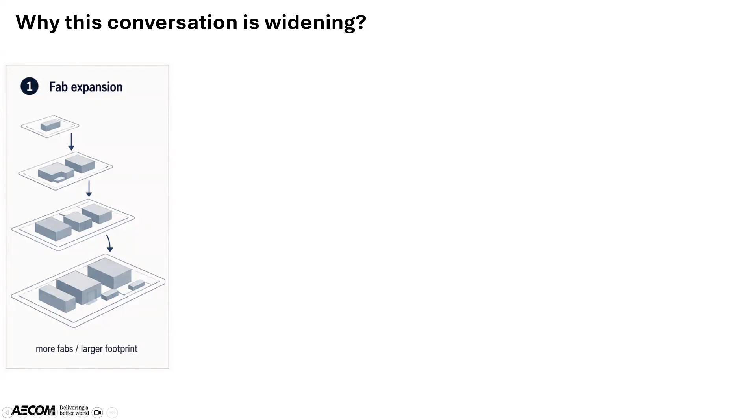Water. What kind of water? Super pure. Yeah, I like it - super. It's called ultra pure, so it's not just clean, it's not just pure, it has to get to that ultra pure water level. So from a solvent standpoint, it's not like your regular water anymore. So the water pressure is very big there.

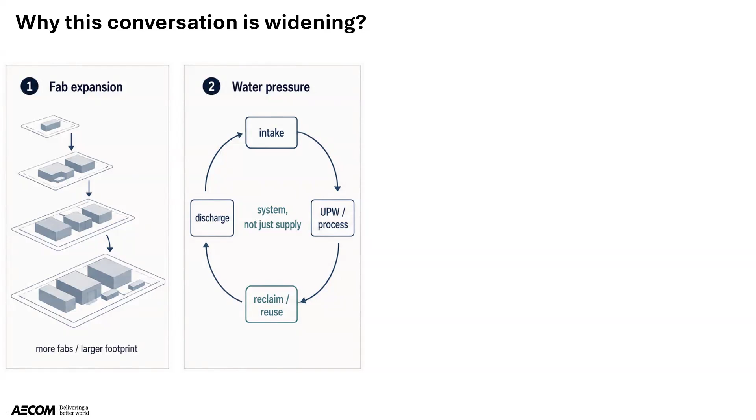So it's not wastewater only, it's also the water that gets into the process itself. But then layer by layer - I don't promise that I'll oversimplify, but I'm trying to communicate the complexity of the challenge we are facing. So the water that gets in, and other solvents and many other chemicals, they have very specific functions. That's a very expensive production line. Nothing is being used there because it's cheap or they're having fun.

Everything there is there for a specific function, and it's not cheap. And that means that soup of chemicals, or different families that we are seeing on the screen, are there to deliver that function. But then that's when the wastewater complexity comes into play. What happens after - let's discuss what happened beyond the fabs. So permitting, wastewater discharge, regulations, maybe.

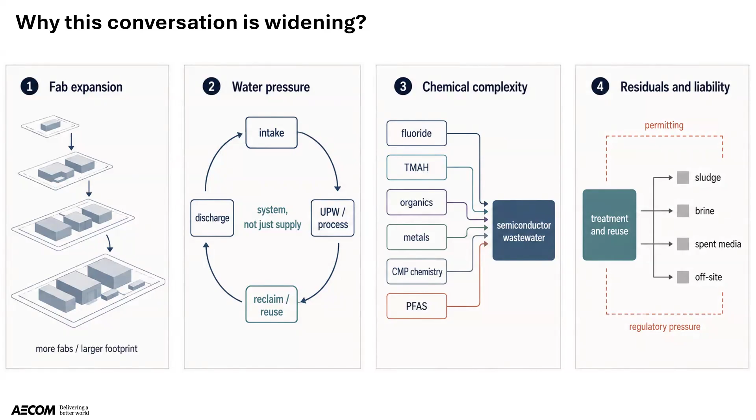That's why I think when people think about semiconductors, it's the exact same word used for many decades. But four decades ago, it was a big device. Now we're talking about nanometers. So it's not only the size of the device that got smaller - to get that small, the fabrication also went through multiple kinds of advancements.

So if we talk about the 80s all the way to the present day, what I'm trying to communicate with you are three things: what is the technology that has been used, what are the chemicals that have been used in that period, and what about the reaction from a regulation point of view - any alignment, any lag or gap?

So pay attention, okay? Again, four decades ago we were talking about semiconductors at that time - a breakthrough, but it was big. And what you see there is chemicals being used, mainly hydrofluoric acid and some other acids, bases, etc.

A couple decades later - I won't give you more detail about the exact description of the technology, but you need to pay attention that the chemistries being introduced to that process are changing. What you see down there is that actually the discussion in 1998 was about the chemistry from 1983. After that, when we went all the way to the nano scale, more chemistries were introduced, including PFAS. But you can see down there, there is quite a gap.

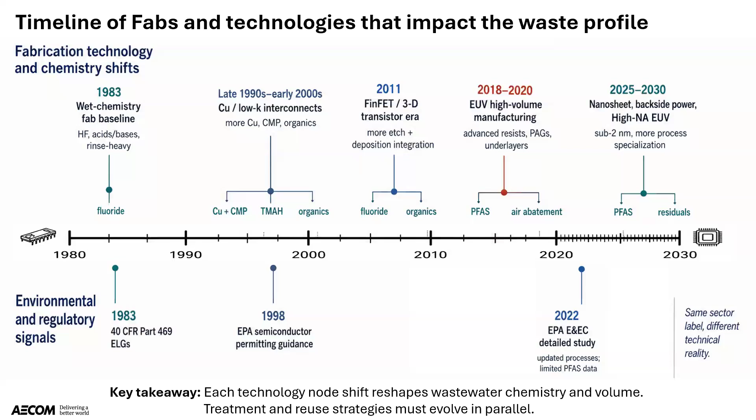Why we're again discussing that today, because we see that there are more push towards regulations of PFAS and other emerging contaminants when it comes to the discharge from semiconductor fabs. So it's the exact same word, semiconductors, but it means different things throughout that period of four decades.

So one would say, do they know anything about that? To be fair, zoom out and be fair - these are two keywords I like. So the semiconductor industry, they have that SIA, Semiconductor Industry Association, for three decades plus. They have been studying what's getting in, what's leaving the facility. It's just like a very tight circle, but they know a lot. And that's, I guess, the take home message - there is a lot of information.

A lot of funding even comes from them that funded a lot of research questions. If you talk to them, the first PFAS membrane study was funded by that association. Some analytical work that I'll discuss later was also funded by them. Not all, but that's basically some of the disconnect - people think they're focusing on one area, but there are others. So there are white papers, there are videos that can be found on their website.

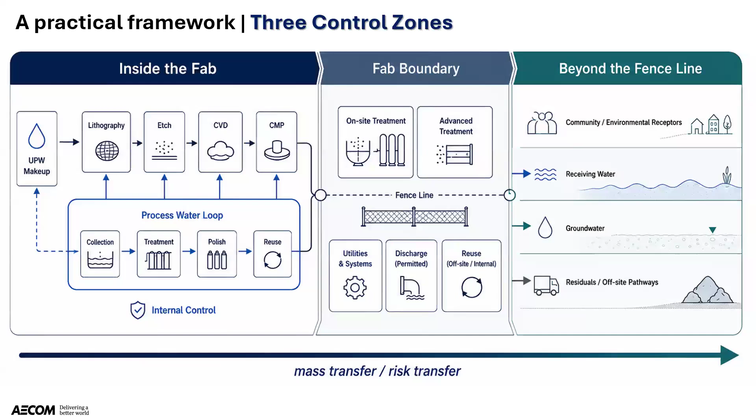Laying the ground, meaning that I wouldn't talk about silos anymore. We need to connect what happened in the fab to what is happening between the fab and environment - meaning treatment technologies, but also considering once residuals, emissions, wastewater leave there, how can we think about it from a holistic point of view? They are all interconnected, they're all impacting each other, and that's how we should be thinking about it. So that's basically that - not just the mass transfer, but the risk transfer is moving from inside the fab technologies, and then later on can be distributed differently.

So when I mentioned - thank you for highlighting that water is the largest solvent - to get to ultra pure water, this is an indirect way to tell you that they know about treatment, like to get the water to the ultra pure stage. This means you know how to treat water.

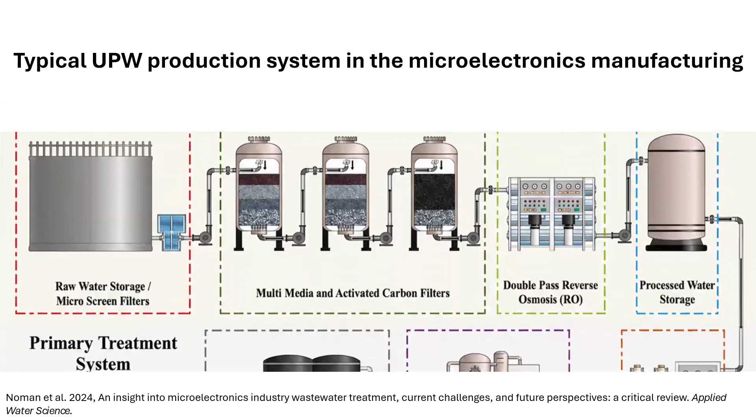But I will need your attention now because I'll have a quiz after this line. Because it doesn't just go with pre-treatment - a lot of removal of salt, desalination, biological, chemical, physical. So it is not just your regular treatment train. I gave you a warning. So how many steps? That's the initial train - it's 15.

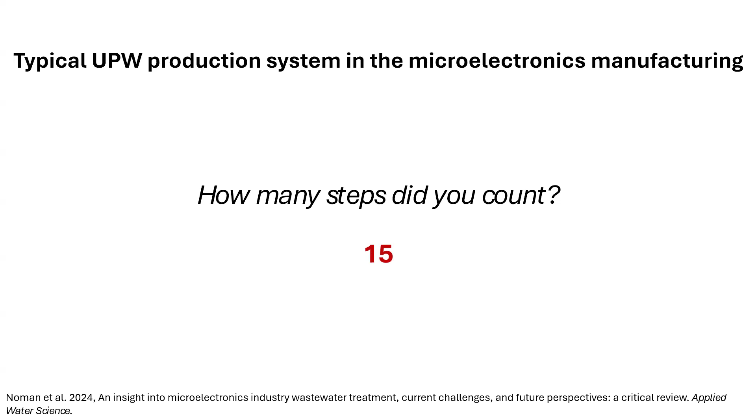So to get ultra pure water, you need to pass your regular source water into 15 steps. Sometimes they take drinking water, but okay.

So you remember the mass transfer, risk transfer? I guess it goes that way as well. But inside the fab, your ultra pure water, you'll get some residuals. But also, when it moves from one step to another, they can be in parallel. You will get different pathways where the contaminants will result from different steps, but also lead to different soup of chemicals - I guess the easiest way to think about it.

Water conservation is one part, but also the sector is about minimizing how much water can be used. So water reuse is a common practice. So knowing what is getting into that reuse step is very important.

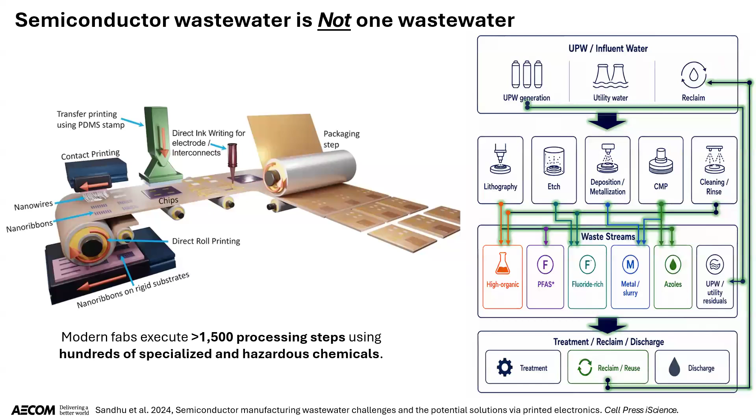And here's another reminder - we talk about water a lot, but this is another reminder that it's not just water. The air, for example, from the etching process - this is just a random example - is what is leading to some fluorinated material in the water space. So your air problem is a water problem as well. Your treatment for water is resulting in residual like solid waste. So everything needs to be put together. It's not just air, it's not just water, it's not just solid. Everything is interconnected. The relative contribution will vary, but the big picture will remain.

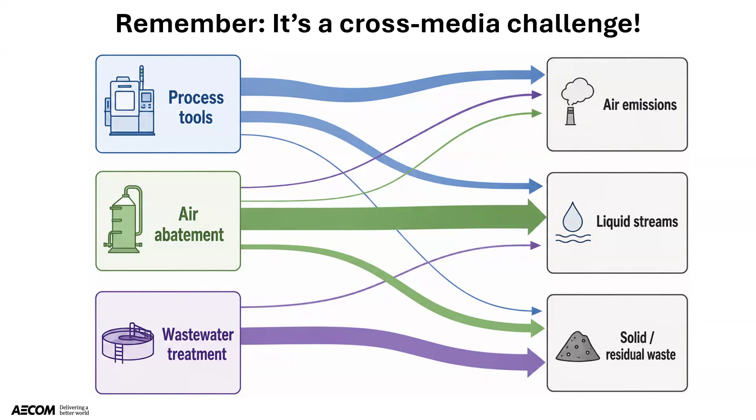So normally my talks are dominated by PFAS, and that's a regular one for me. But what I'm trying to communicate here is, again, not to overwhelm you that it is overcomplicated, but acknowledgement of that complication or the challenges is a very important first step if we want to make it a better scenario.

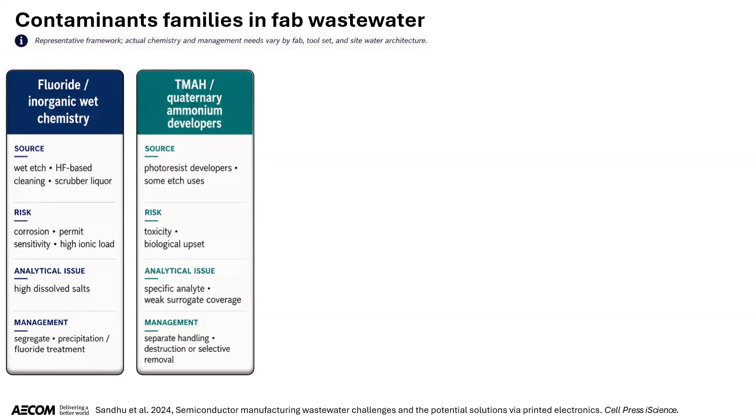But it's not just one thing, so from an analytical point of view, you will need to know how to measure that in that mixture. Solvents—we talk about water, but other solvents, actual organic solvents, are being used for these different steps. So you'll get high COD values, VOCs are there, and that soup is getting more and more complicated.

Metals are there from metal plating, the packaging steps, etc. So you'll get a variety, depending on the technology you're relying on—CMP process and the chemistry in there, and the packaging, including azoles. These, I guess, will be the main focus for the next two presentations.

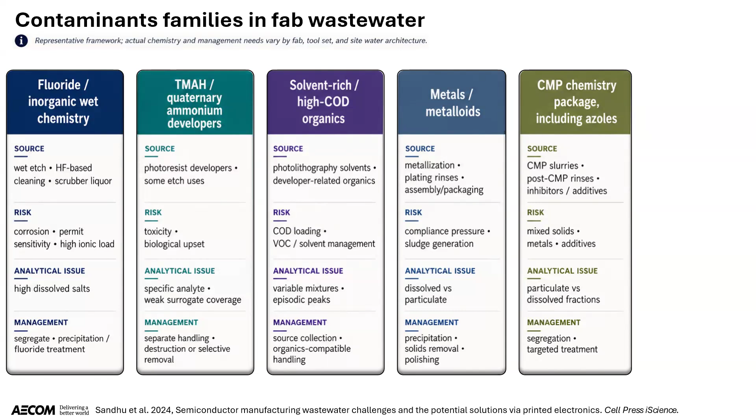But what I'm telling you, it doesn't come alone. Again, my favorite—not really—PFAS is there as well. They come from different steps, and soon I'll show you that they are not going away.

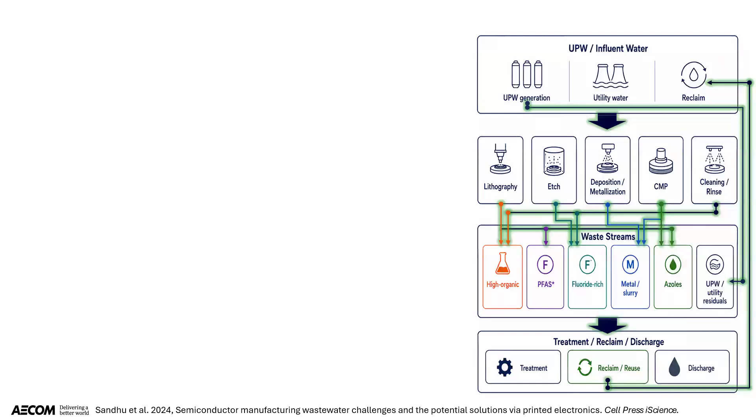I promise, I don't want you to read anything there, but that's what you are potentially looking at when it comes to dissecting that wastewater. You will get a soup of chemicals that come from different sources, different flavors. Don't taste it—but that's the mixture you will end up having.

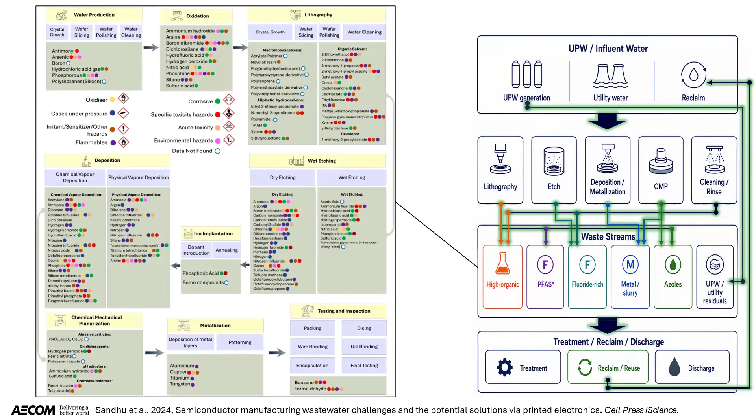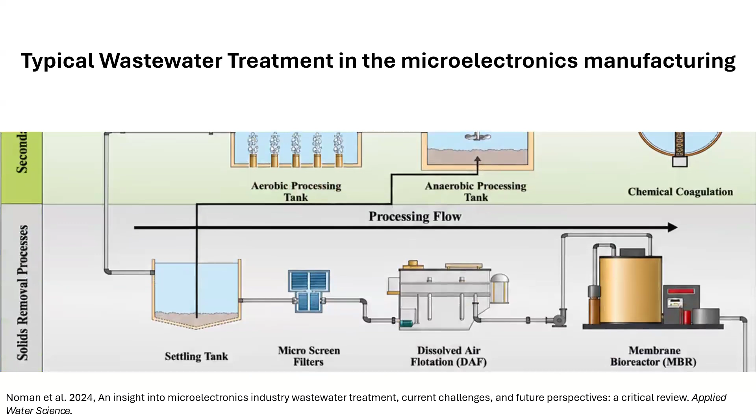And that translates to another thing. Okay, now you're ready, right? So talking about wastewater—the wastewater leaving there, especially if you talk about MLD or ZLD, zero liquid discharge or minimal liquid discharge, your wastewater needs to pass through many steps: physical, chemical, biological, if you are considering or relying on reuse as a practice to minimize your water intake and consumption.

Okay. Oh wow, love that. Okay. Thank you. Okay, see, it's the benefit of not getting the session after the lunch.

So I guess, logically speaking, if we want to minimize the complexity, you need to think about segregating these waste streams. But that's a luxury, because some of these fabs are already built, some already designed—it's a very expensive process. And there is no clear or hard regulation pressure for some of these chemicals. But if we want to approach it constructively, how can we minimize that complexity and maximize the potential treatment efficiency? Waste segregation.

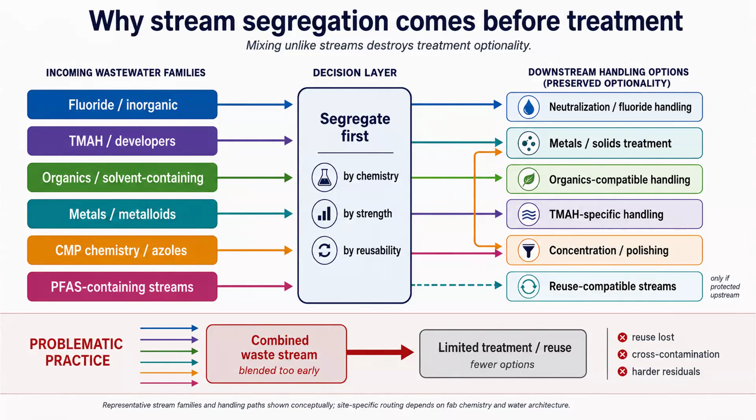But again, from a sector perspective, someone sitting in from Micron is just like, of course we know that—we segregate different waste streams because we want to recover metals, we want to reuse certain waste streams. So it is happening, but is it part of common practice, or at the scale that we need, and the source of wastewater that we hope for?

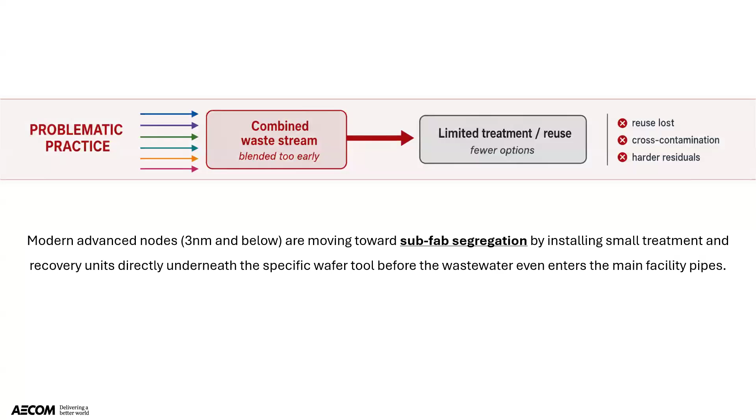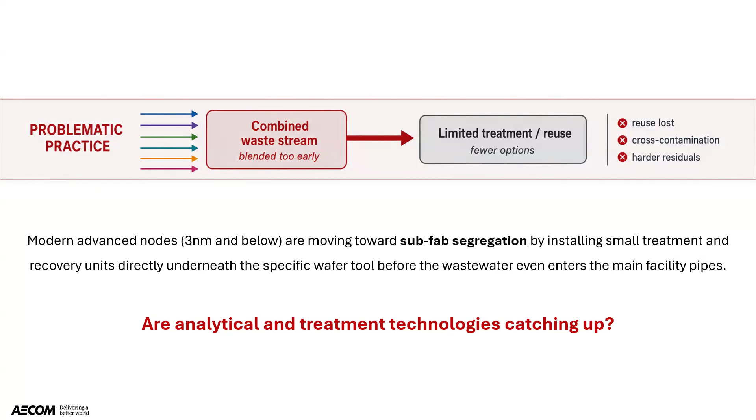Well, not there yet. But again, you remember my favorite word? Fair. To be fair, there are actually some analytical and treatment technologies that are really catching up with that purpose of waste segregation and management of different waste streams. What I mean by that—now I can come back to my favorite, PFAS.

Okay, so why PFAS? It's not just a buzzword—it is literally not going away. It's an essential part of that process. When a Cornell study published the estimation for the potential use of PFAS in the next 10 years, it will just keep going up. So it is there, and it is not going away.

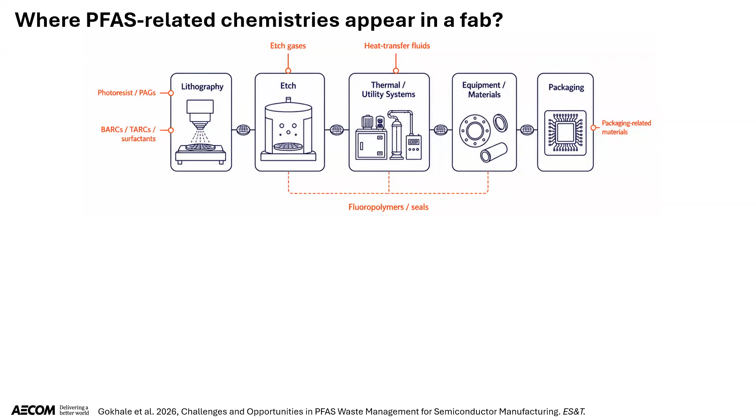But where is it coming from? Again, not all processes in the fab are producing PFAS or a source of PFAS—they come from certain specific units that deliver specific functions. So we have a variety of different PFAS structures, but that's not as easy a matrix to characterize. Characterizing the wastewater in there is one of the major challenges.

So if you want to convince someone that you need to do better, you need to show them how, and the analytical challenges are not catching up. I can spend a whole presentation on analytical work for semiconductors, but NMR, for example, is catching up because it can avoid a lot of limitations. You remember the first column—it was fluoride.

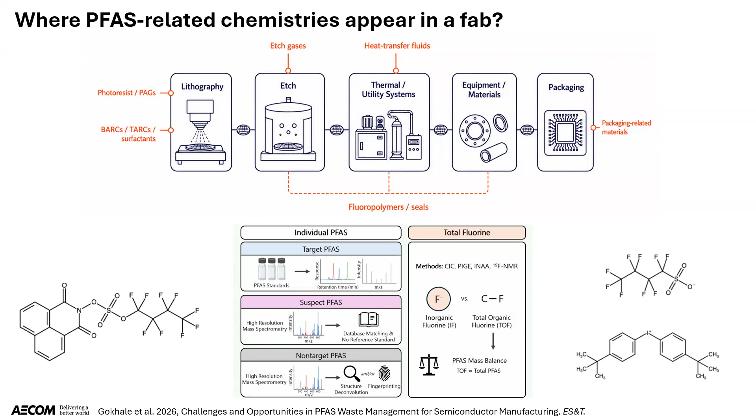If you are trying to quantify, from the previous presentation on PFAS destruction, if you aim at mineralization to get fluoride as a final product, and you have ppm of fluoride in the background, how can you reliably and practically quantify that or make sure your treatment or destruction is working? It's still a challenge and a bottleneck.

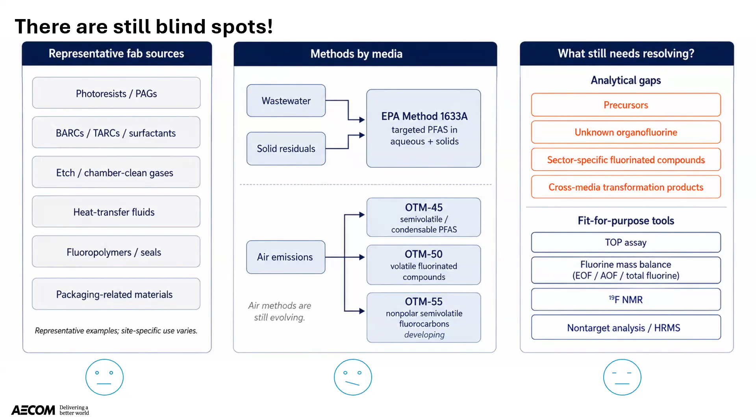So this is where we are. We know how to identify sources, how we can potentially segregate them, but then we get into a reality check. What are the tools available to measure PFAS in air, PFAS in water? You can see now it's getting a smaller menu. So there are a lot of challenges before we can comfortably say we know how to do it. Same applies to destruction.

I guess Silvana put that very good quote, what was it? Vision without funding is hallucination. Yeah, so that's it.

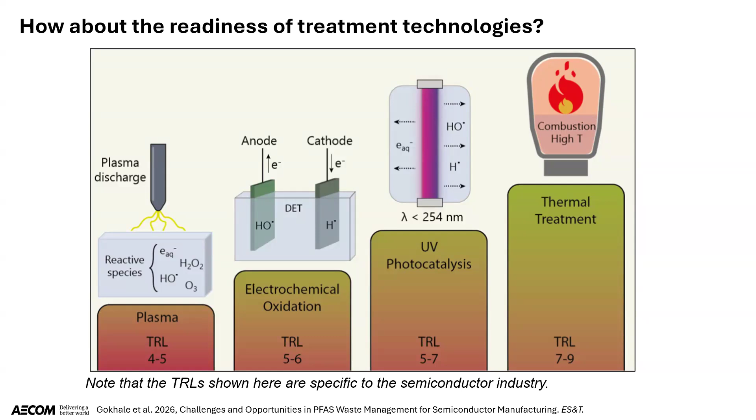Okay, I'll wrap it up soon, but from a logical perspective, we know how we can make it better. This is just one of the examples. If we can segregate, pre-treat, and then think about how we can manage that waste, we can get it done.

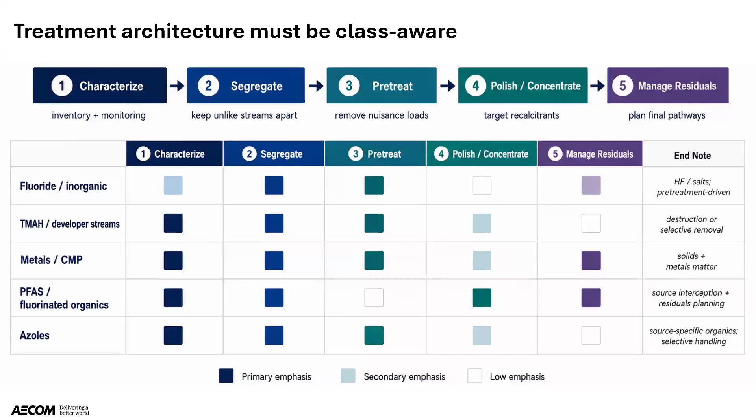So I'll leave you with six questions as of 2026, when you are trying to think about fab better practice. We need to think about which contaminant family controls the risk, so we need some risk assessment. Then from that overwhelming number of chemicals, we need to think about these families of chemicals, their sources, etc.

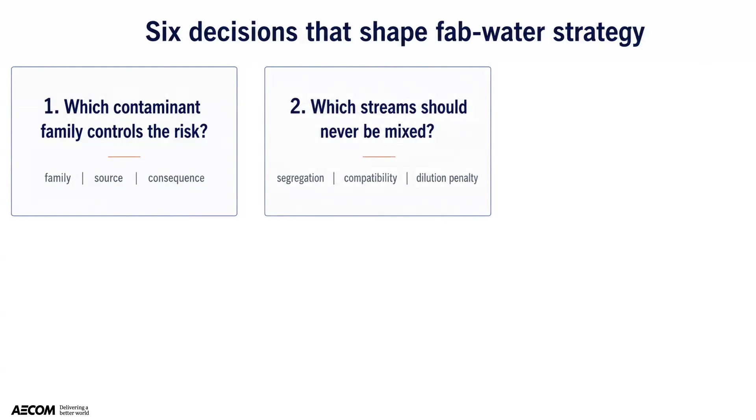Segregation, with the hope for treatment. Then we need to think about which streams should never be mixed, because once they are diluted, it's much more expensive to manage. But then a third question is what is worth protecting in terms of these streams. How can we evaluate that is key to the success of the other questions.

So measurements, analytical techniques, and how frequently we can do that. Do you really need an inline sensor for continuous monitoring of certain contaminants, or can something be more episodic?

So that's five - the residuals. Because again, what happens in the fab eventually will impact the environment in one way or another. Solid residuals, air emissions, and others need to be considered very seriously.

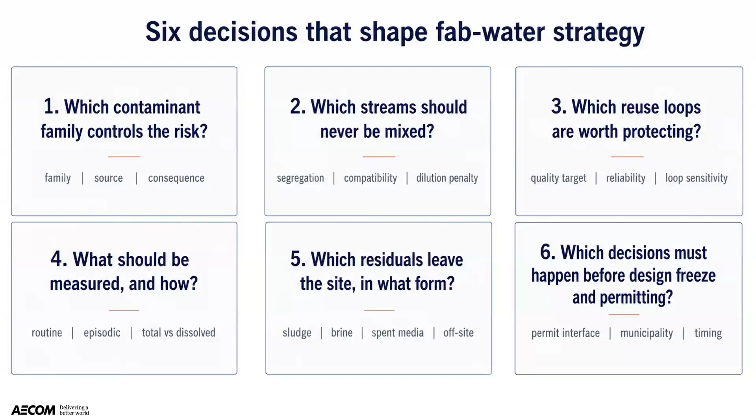Again, from a fab's point of view, there's certain infrastructure that's very hard to change and almost impossible to do. But if we're now in a period where a lot of funding is going into designing and building more fabs, what are the questions we should prioritize before any design freeze or permitting? That linear, interconnected relationship between inside the fab, treatment, and release - now you can see it's actually more interconnected than just a linear fashion.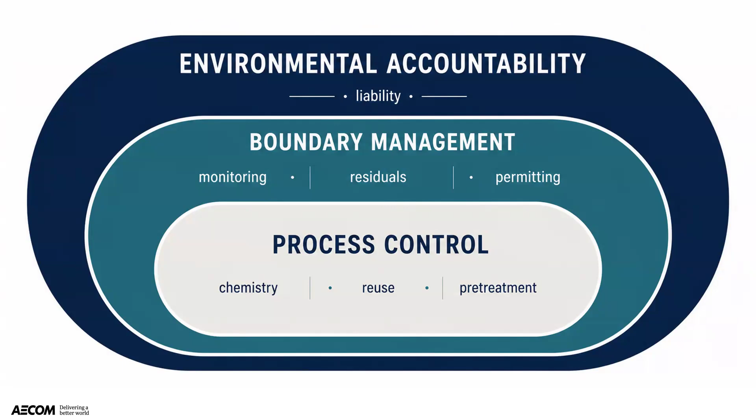Okay, I'll stop here. Thank you.

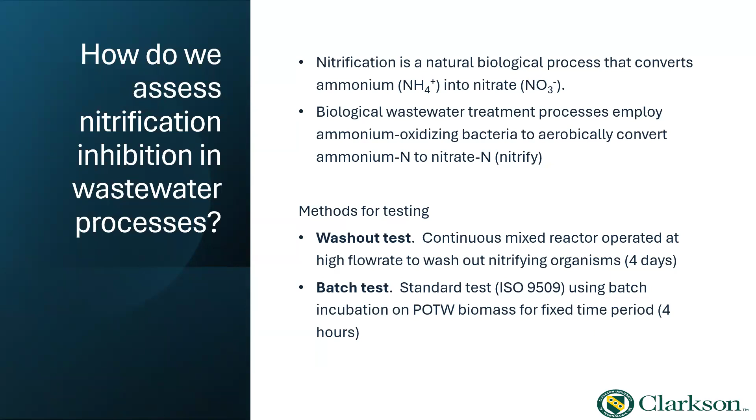The one with the washout test takes 4 days or 5 days to complete. The other one is 4 hours. So there is a clear incentive for one or the other from an analytical perspective, but there's always some benefits. So talking about both of those processes, the washout test is a chemostat or a biological process where you take the sludge culture from the wastewater treatment plant you're concerned about.

So you take activated sludge from that plant and you feed your wastewater at a higher rate than the nitrifying organisms can grow. And so what that means, because you don't have a clarifier sitting on the end of it, is that you're eventually losing your biomass. You're washing them out at this high rate of hydraulic flow because they can't grow quickly enough to recuperate. And so that's what's called washout in a biological process.

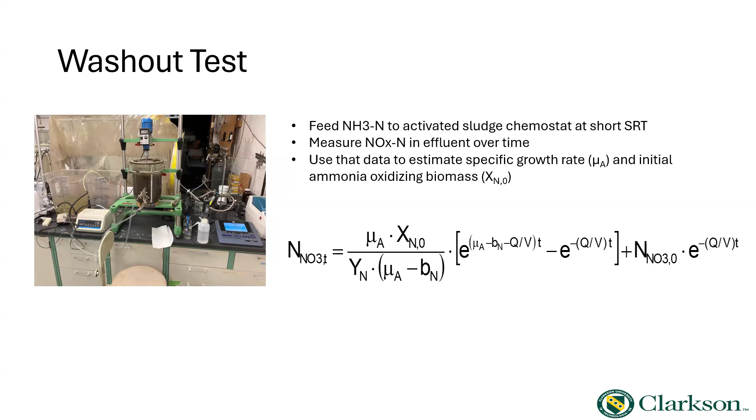So the process engineer loves this because they have this number and this number, and they can design the reactors based on them. Okay, so this is a great example of a complex waste stream. I don't know what is in that waste stream. I just know what it does to my activated sludge culture, right? So the next question is, what is a potential problem? Well, it takes 4 days. That's a challenge. You have to do it with the culture you're trying to investigate.

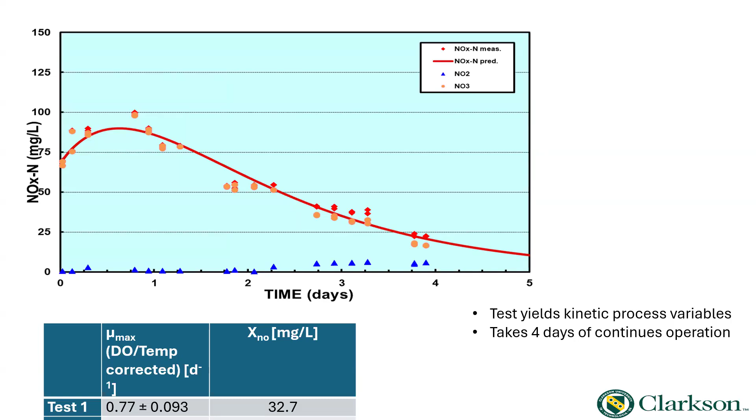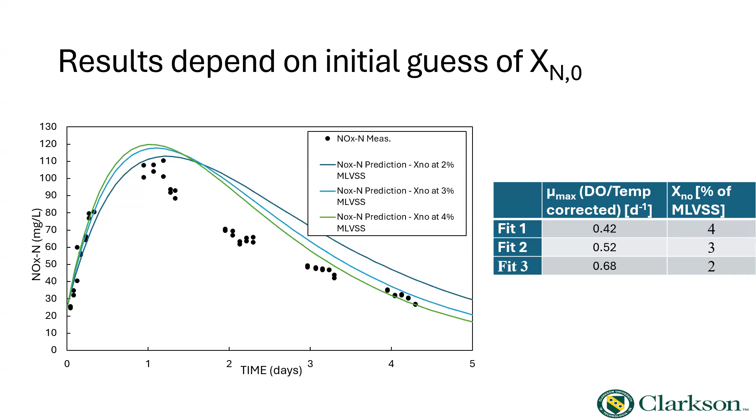The alternative experiment, or a different type of experiment, is the nitrifying inhibition experiment. It's a batch experiment. So that's ISO, I always forget the number, it's written right there, 9509. So it's a batch experiment where we're trying to look at the inhibition. So we calculate the inhibition of a compound at a certain concentration relative to

a control. And so I have a control experiment where I don't have any chemical of concern in the solution added to an activated sludge culture. And then I have an experiment where I measure nitrifying activity relative to different concentrations. And ultimately, I'm calculating that inhibition coefficient, this Ki.

And I measure the inhibition, the nitrifying activity, after just 4 hours. So it's a batch experiment, 4 hours, well-aerated culture. And I do this at multiple concentrations, so 6 different concentrations. And so I'll give you an example how that looked for us.

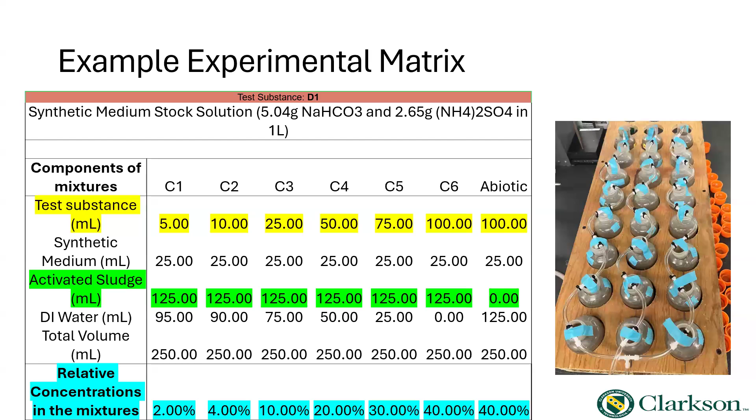And what we're interested in essentially is the inhibition factor, the concentration where we see 50% inhibition occur. So for triazole, it's 3.5 milligrams per liter. For benzotriazoles, it's about 2 milligrams per liter, and the MeBTA is 2 milligrams per liter. So these are known inhibitors. There's lots in the literature. So our work is consistent with those parameters, pretty much the same.

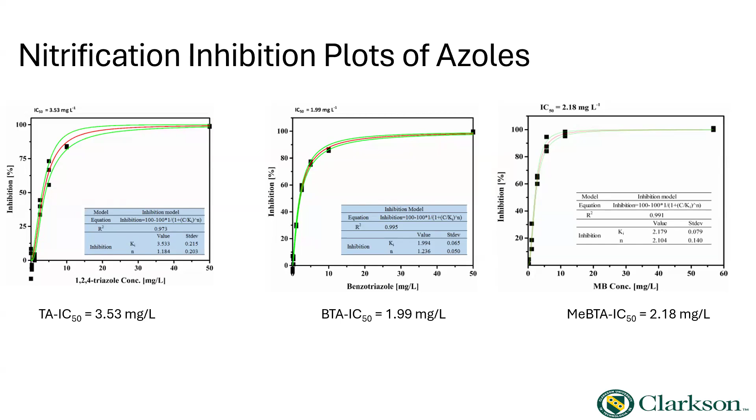Right. So this is a very easy test to look at that particular waste stream. And we did these because we knew these azoles are used in the fab, just to evaluate our tests and be consistent with other people in the literature. I want to give you an example of where we tried this.

So the company we worked with was interested in ultimately reducing that toxicity impact to the municipality. And one place where that could occur is the corrosion inhibitors in their cooling towers. They use corrosion inhibitors in their cooling towers like anybody else does. And a lot of those corrosion inhibitors contain azoles. Right? So these are one part of those.

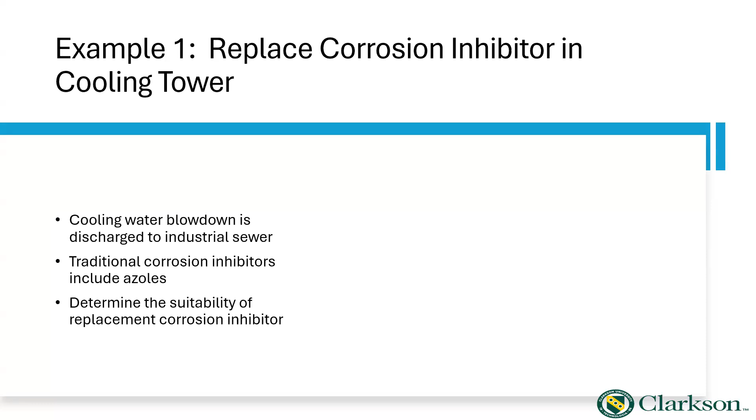And the company they worked with, the subcontractor, came up with a new formulation of a corrosion inhibitor. They tested it in terms of efficiency, whether it would actually prevent corrosion in their piping system. And then we were charged to look at whether that would positively impact the toxicity. In other words, reduce toxicity.

And so what we did is we looked at their different types of products. The company is actually Nalco. They have different azole-type corrosion inhibitors. And then they also have this market product 3DT398. I don't necessarily know what's in there. It's just supposedly a chemical which has no azole-containing material.

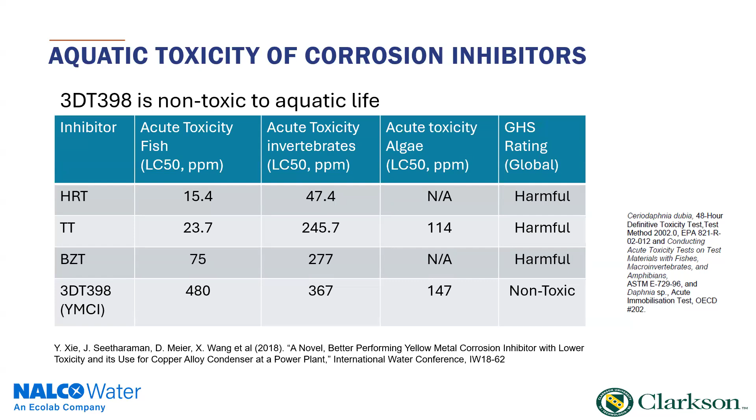And so they did internal testing for acute toxicity against different types of environmental concern: algae, fish, and invertebrates. And you can see the numbers are higher, or it's essentially non-toxic, relative to the azole-containing corrosion inhibitors. So what we then did is we similarly tested that product against the one they had earlier. The material they had used earlier is the 3DT230, which contained azoles.

So here's our toxicity test of that material. You can see that for this material, at about 123 milligrams per liter, you see 50% toxicity. So it's actually a pretty high concentration. They think that's not very toxic, relatively speaking.

When you look at the data which we received for that new component, the data is all over the place. But one thing that is noticeable is that it never reaches 50% toxicity. It really hovers around 40% toxicity. Right? So we really couldn't get a very good fit in terms of what the IC50 is for that material, for that pure compound.

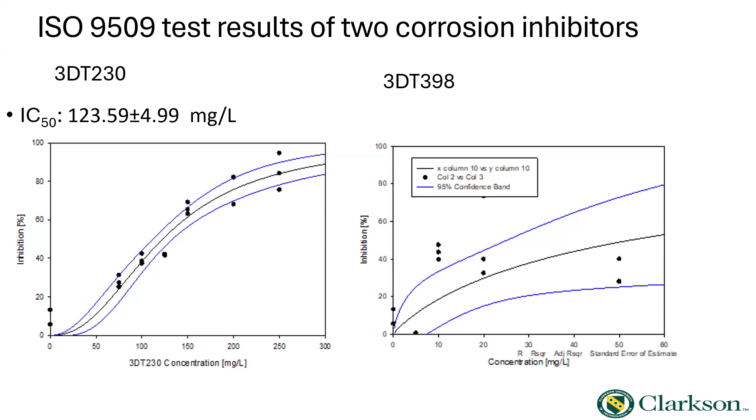Remember, we're not using anywhere close to these concentrations as a corrosion inhibitor in that cooling water. So what we then measured is ultimately the blowdown. The blowdown is when, every once in a while, that water, which is accumulating in the cooling tower, gets released and put into the sewer system. So essentially they empty out that blowdown and release it into the sewer system. And for that blowdown, we can measure the overall toxicity.

Obviously the blowdown doesn't represent 20% of my overall fab effluent, but that's what that number indicates. Whereas if you look after the change, you really couldn't find any toxicity. So this is an example where we used inhibition testing as a validation that this new corrosion inhibitor is markedly better and reduced the overall toxicity of their fab effluent. So that was one example.

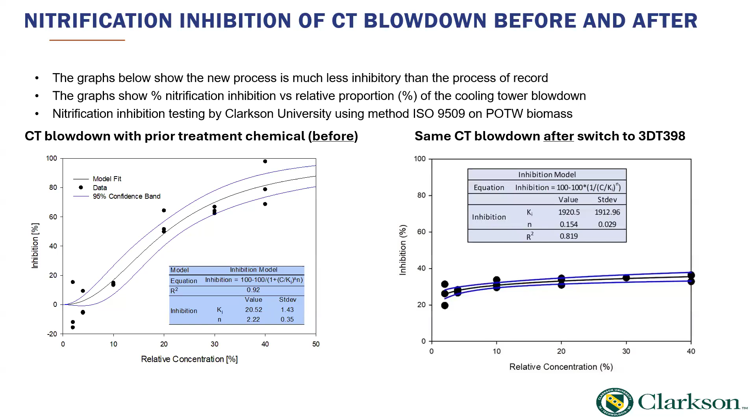Another example, and we're still working on this, is what happens when you go in the fab. The fab, as Mohab described, is a really complex entity of many, many processes going on at the same time. A lot of those processes are batch processes, and this waste gets released into a very complex sewer system. Some waste gets separated immediately and probably doesn't enter the sewer system, while other wastes go into it. They get blended, and eventually they get released through the fab effluent.

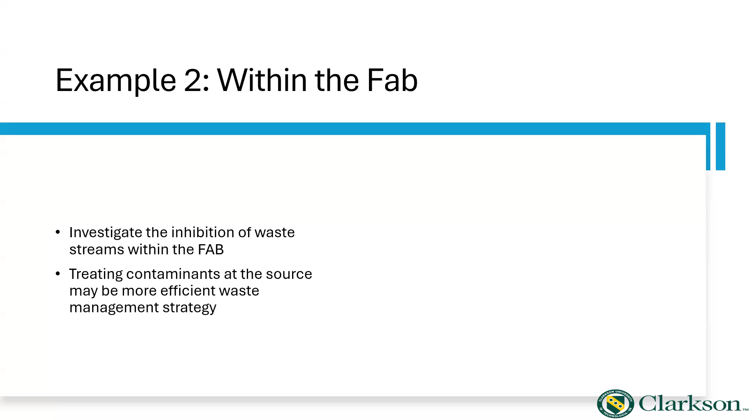So what we wanted to study is: can we identify streams within the fab which are potentially more toxic than others? Not necessarily looking at the total mass balance, because one waste might be high volume versus another blended together. We just wanted to look at the individual toxicity of these individual streams. And so I'll just give you one example.

For a particular manhole, we had 3 different streams going into one manhole. We tested these different streams for known inhibitors, the azoles. We also measured conductivity, and for some other ones we used TMAH, which is what Mohab described before. So we measured concentrations. These concentrations down here, if not indicated otherwise, are micrograms per liter, so very low. Remember, the inhibitor concentration for triazole was about 2 milligrams per liter, so this would be close to that.

So for that particular stream, you would expect 50% inhibition just because of the triazole. We measured those concentrations in micrograms per liter, and then we measured the inhibition of that particular waste stream. The inhibition of this waste stream was 17%, meaning that if that waste stream were 17% of my total wastewater, I would expect 50% nitrification inhibition. That's how you would read that. Then you have stream number 3 and number 1, and each of those we characterized.

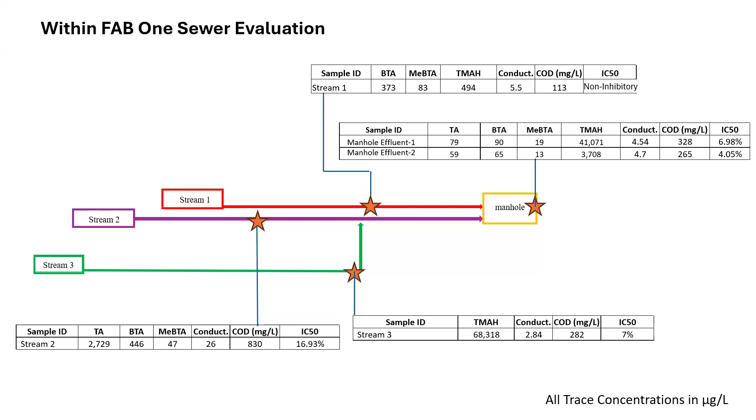If we know, then we could say, well, this is a very toxic waste stream - maybe we don't put that in the sewer system, we just treat it separately. That would be the engineering answer: keep that separate and reduce the overall toxic impact of the fab. That's the usability of that testing. We are continually working with the fab to identify those particular waste streams so we can source-isolate them from the main wastewater stream.

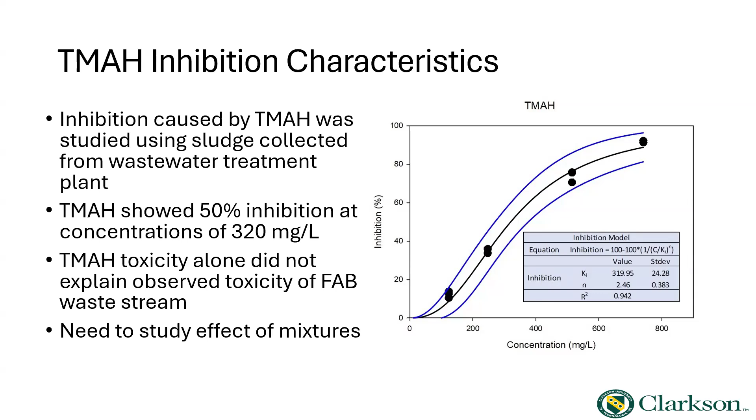So in addition to just looking at individual compounds, we need to understand what mixtures of chemicals do to the overall net impact, because it's not additive. We're adding a whole bunch of chemicals together, and it's not necessarily an additive effect in terms of toxic effects.

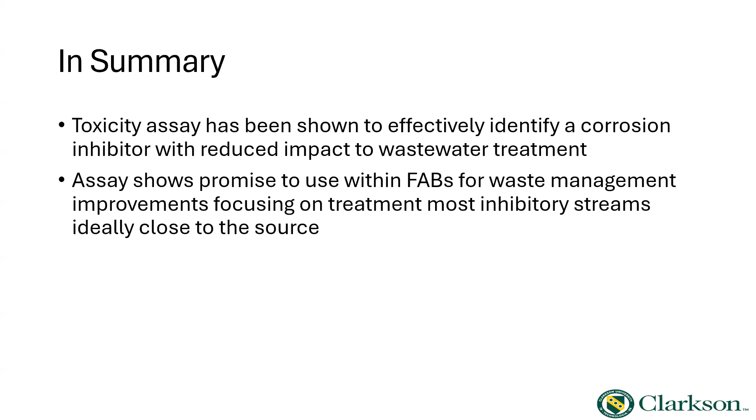So in summary, I showed you a couple of assays and how we can use this tool - these batch experiments - to identify and make decisions within the fab to make it less impactful for downstream wastewater processing. But we need to link that tool with analytical methods or sensors to identify the specific toxic elements. There's more science to be done to close those gaps. All right, I think that's the last slide. Okay, thank you.

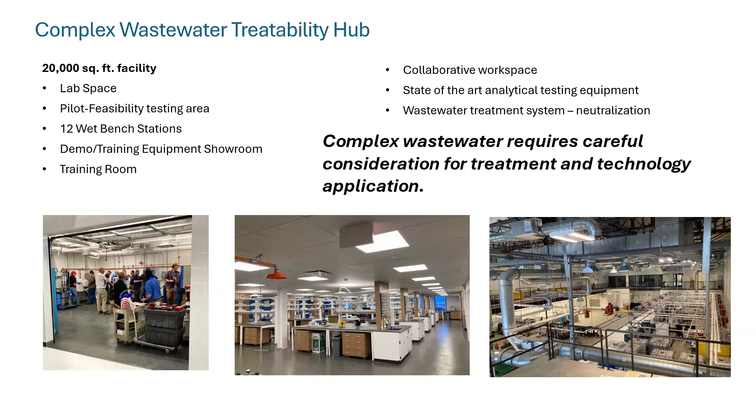So let me get to the challenge we had. We had a semiconductor facility that was increasing production and was going to be discharging azole compounds to the local authority. The local authority finally said we are reaching the limit of what we can take from an azole perspective into our facility. They were obviously able to deal with it, but we're reaching a point where they would either have to increase their infrastructure or this semiconductor facility would have to reduce the amount of azoles.

There wasn't really, first of all, any online metrology for azole detection at the moment. We're working on it, but it's not there today. So we utilized both the Pittsburgh facility and our innovation labs, and did extensive testing around azole destruction, looking at advanced oxidation processes, mostly trying to utilize UV so we didn't have to implement too much chemical. However, given the background of these waste streams and what's in them, the UV intensity gets impaired. So we stepped back a little and looked at some physical chemistry of what we could do to break down these azoles.

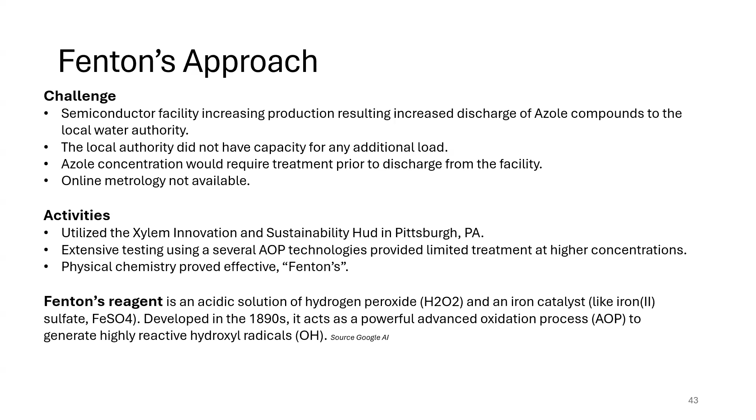So in our testing, we used sulfuric acid for pH adjustment and also iron chloride, which were added in a test that I'll show on the next slide.

We kept a constant temperature of about 60 degrees C in the reaction. You can see the cumulative doses of peroxide that were used.

So we're using both the ferrous chloride and the peroxide, along with temperature and time, to work on breaking down those azoles. In that timeline, anywhere from 120 to 135 minutes, we're able to get 90 plus percent reduction of all azoles in that waste stream, reducing what's now going to the outfall of the facility.

What we're finding is that there's a limit the POTW can take, or if they've got an end-of-pipe reclaim with a biological system, there's a point where they'll run over that toxicity limit. So we're able to adjust the chemical and time to reduce the amount of chemical we use and still meet those minimal parameters.

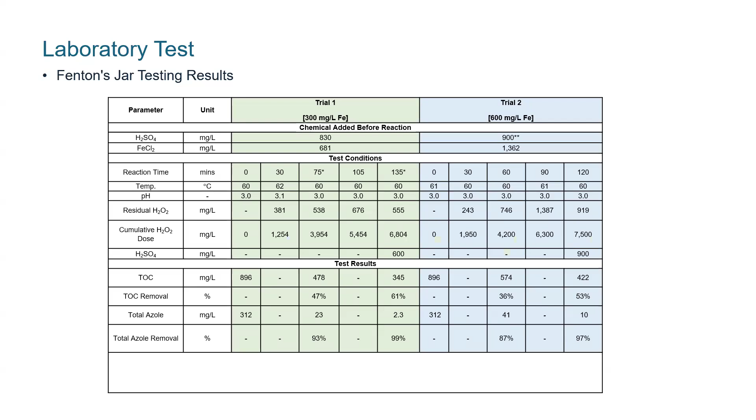The first test we did, summarizing the results, we actually didn't start taking samples until 75 minutes into the reaction. It was a simple setup with a beaker, heater, pump, and recirculation, dosed, and you can see over the timeline what the concentration reduction was.

I can say that the benzotriazoles are readily removed in the process very quickly. It's the pyrazoles and 1,2,4-triazoles that seem to need longer time in order to break down in the system.

The other part of it is the analytical methods weren't very clear on actually measuring azoles in these waste streams. So we ended up working with a lab we work with for our PFAS solutions. To Chuck's point, he was rather upset when we sent him the first samples, and he tore up his mass spec chromatography unit. This is where I get out of my depth a bit, being a mechanical guy.

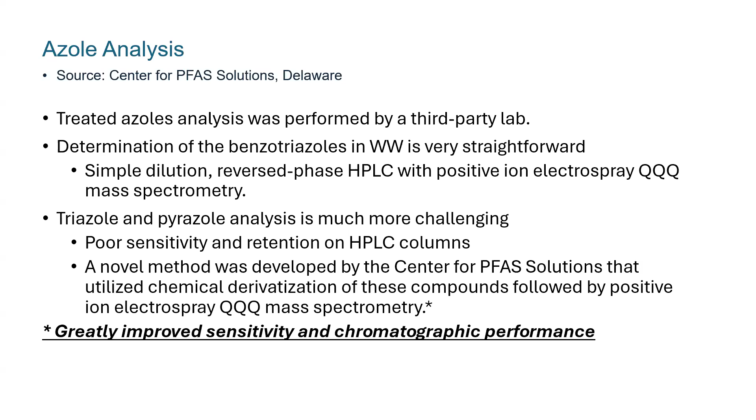Again, the benzotriazoles were relatively easy to sample. He did some overspike sampling to see what the recovery was, and from a duplicate sample perspective, we were within 2% to 5% relative difference. We actually made some dummy samples in our facility to send to the lab to see what the results would be, and they were within 2 to 5% accuracy.

The client we were working with had their own method for measuring the azoles in the stream, and from an analytical error perspective, we're again within 2 to 5%. So we're confident with the numbers we're seeing in the process.

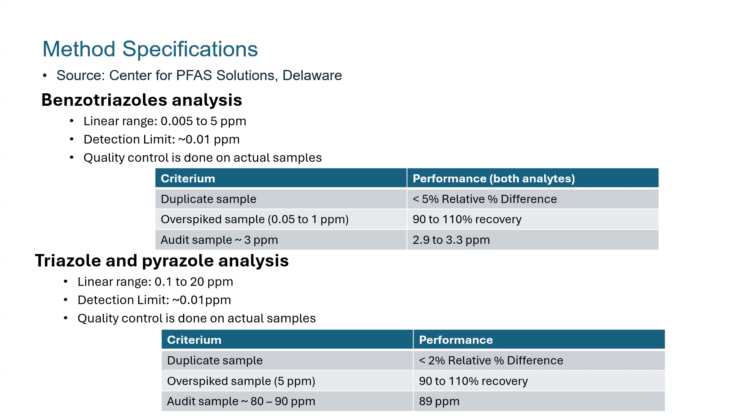Just a little bit about the process itself: it's really a feed and bleed setup using temperature, the ferrous chloride, and peroxide for the reaction. We're running at about 60 degrees C, or 140 degrees Fahrenheit, and with the recirculation we're able to do a lot of heat recovery, so we're not wasting heat at the end of the day.

The package itself is a fully off-site manufactured package, which you guys probably have no desire to know about, along with what the materials are.

What we've found in the field is we actually have 2 of these up and operating now, and we are getting better than predicted. As an organization, you have to guarantee a number, so we guaranteed 90%, but we are getting upwards of 97 to 98% destruction of the azoles.